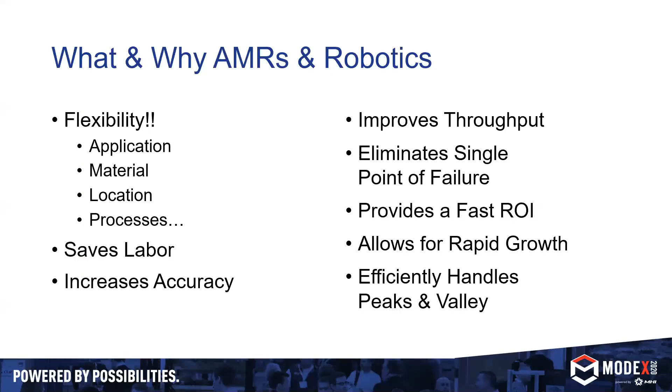You keep on working without losing any throughput, productivity, or meeting your daily requirements. There's always a fast ROI when done correctly, and it allows for rapid growth. Once again, back to that flexibility - you can add devices, add different systems, grow while you're actually using it, and it helps handle the peaks and valleys of everybody's business very, very well. It's all a matter of design.

It's so flexible that there's what we call an easy proof of concept, or POC program, that Conveyco just launched. It allows us to use that flexibility and scalability, not to mention it's easy to move and locate, with minimum infrastructure needed to design a system. We use our Right Fit 7-step methodology process to walk down the path, starting with identifying needs, desires, and objectives, moving on to data analysis, going into design and system emulation, being able to price out what a full system is versus what a smaller proof of concept segment will require.

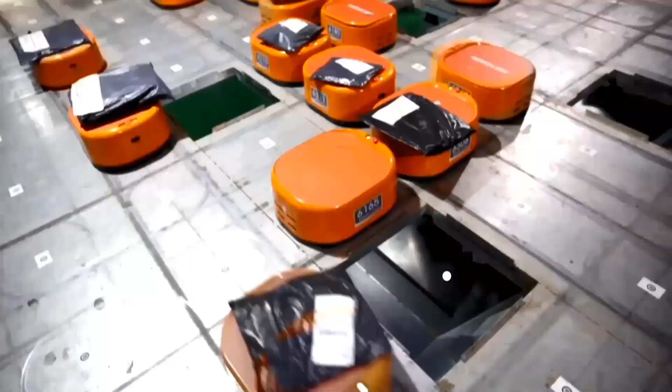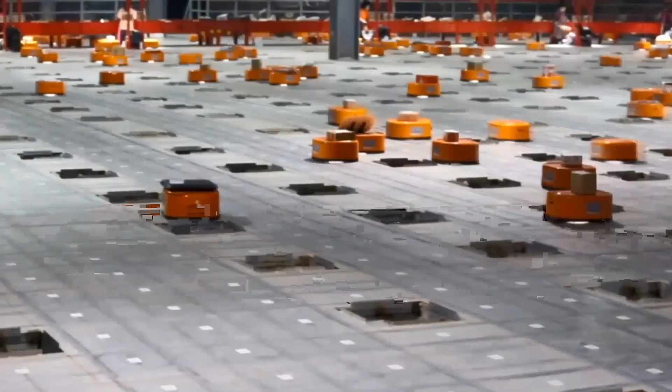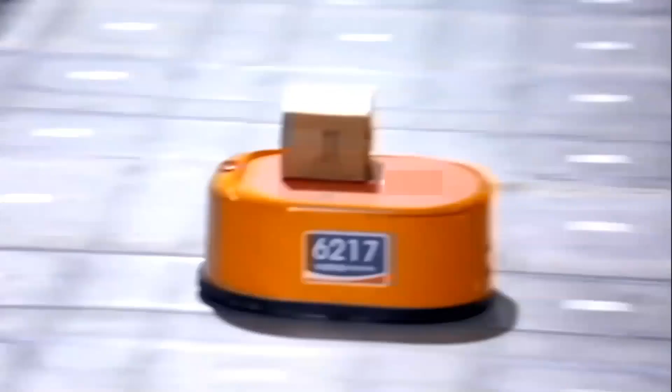High-speed sortation. This is an example of bots that are being inducted. You have your induction, taking the items, putting them on top of the bots. There's a reader up above, it reads the barcode, takes off, and goes to its chute. Each chute represents an order. They work in tandem, they're autonomous, but there's of course a central robot control system. This model tilts, goes down the chute to complete its order, and the order keeps being filled as the bots keep going until it's done, and I'll show you in a second.

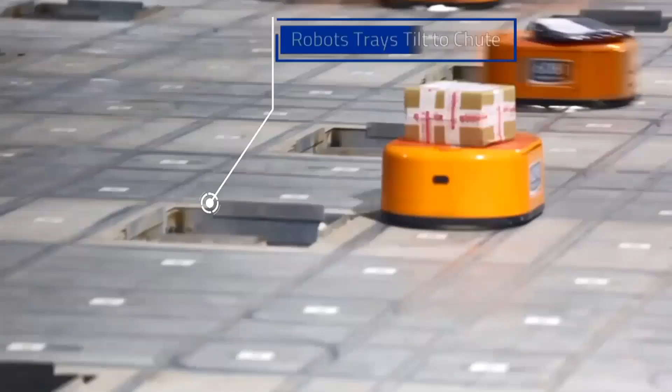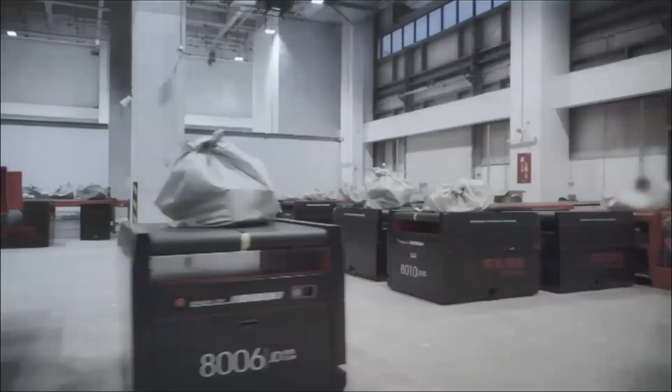Right now in this type of system, we're on a mezzanine, so we're on the top level and the chutes are down below. When the parcels come down the chute, they're being collected. When the bags are full, either a person or an AMR comes to collect them, delivers them to shipping, and right out on the truck.

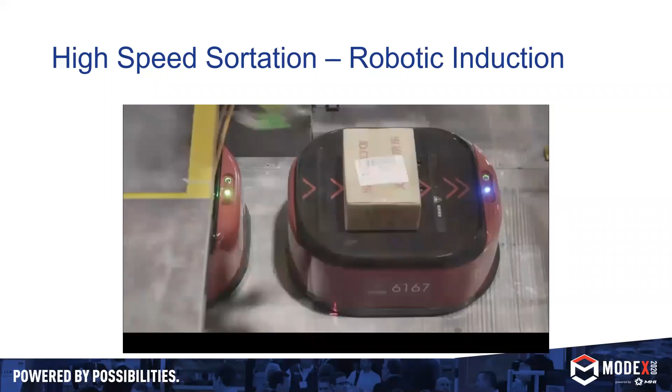So it can be as manual or as automated as necessary, and that all boils down to the return on investment. What does that look like, what does it require? Because we just saw human beings doing the induction, but in some cases it's robotics. It's being able to use robotic arms to place the items, the inventory, on the bots, at which point then, same exact application, they go to their chutes and drop it. This is all a matter of labor and return on investment. What makes the most sense for you?

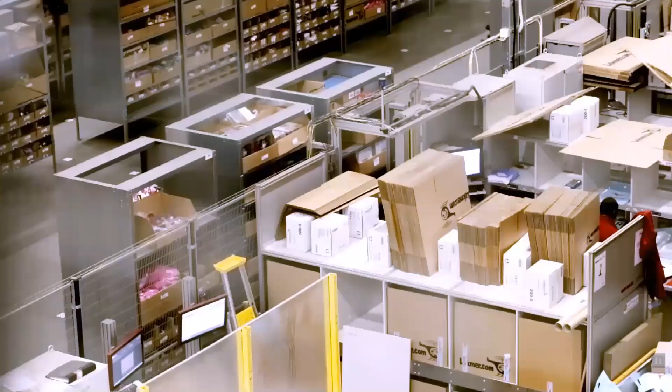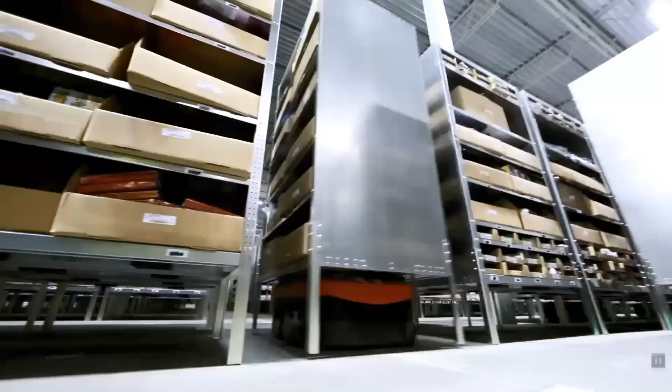Goods to person. This is a great application in which you have an area with low shelves, and you have bots that go underneath the system, underneath the specific shelf that it requires, lifts, picks it up, and brings it to the workstation. In this system we're looking at, there's 1,500 racks, 65 AGVs, 3,500 different SKUs. They're replenished, stored in the area.

In this system, you've got a 20% savings of space, 60% savings of labor.

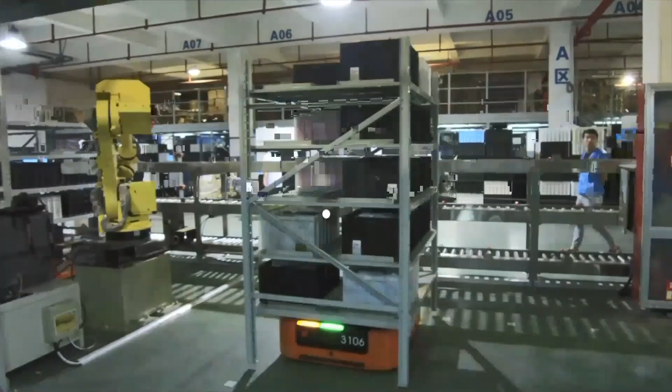Likewise, that same concept, but in this case, I'm using a robot. It's all about the justification. So I could be feeding from manufacturing, I could be feeding from inbound. The robot's picking the totes, putting them on the shelving. Shelving's picked up by its AMR, and now it's being delivered either to a pick window or a pick station, to storage, could be replenishment, could be shipping. But it's all about what the ROI dictates and what makes sense for your business requirements.

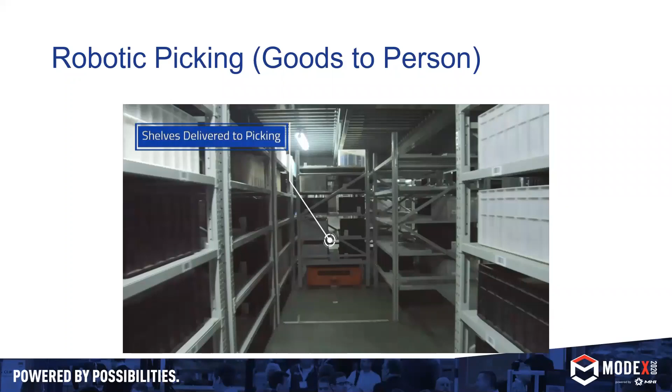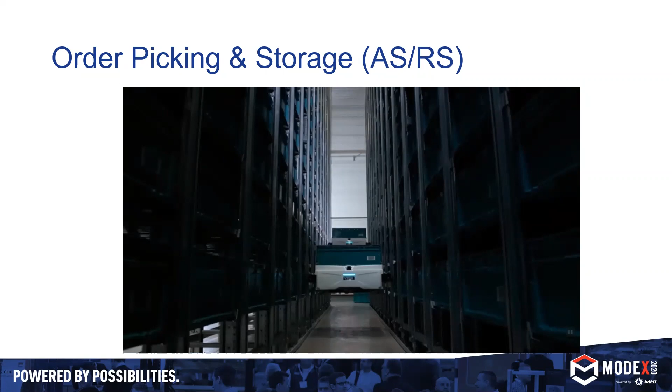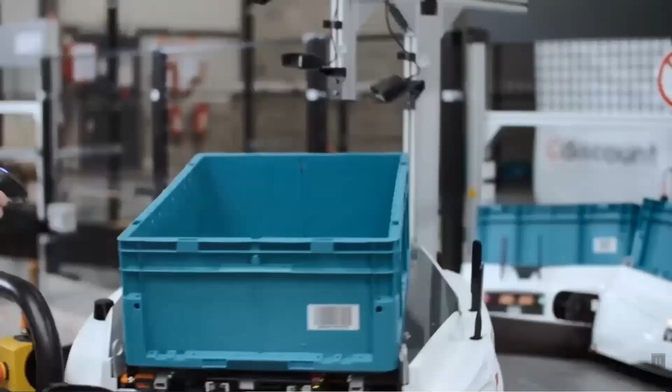This is a brand new technology in which it combines AMRs and high density storage to create an ASRS system. These bots travel on 3 axes. They go up to the shelving, climb up, go to the position they require, take the tote out, bring it down to the floor, and deliver it to a workstation. What makes this beautiful is that the workstations are easy to create. You can use more, you can use less, based upon your actual business.

In this illustration, you can see a little bit easier that the bots use their 3 axes, move on the floor, climb vertically, grab the tote, the inventory. You can add additional storage without missing a beat within the system. You can add bots without missing a beat, so that your velocity and your capacity are totally flexible.

We're back to that flexible message with AMRs.

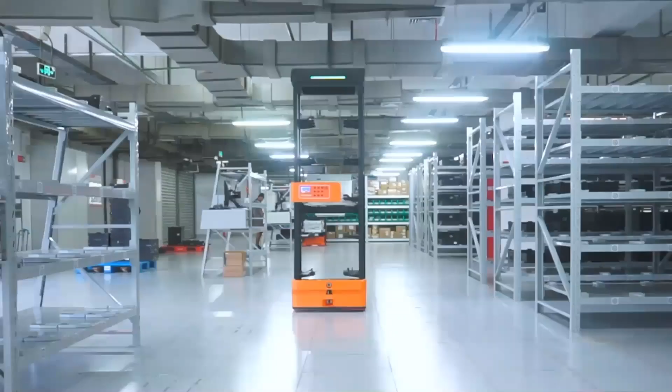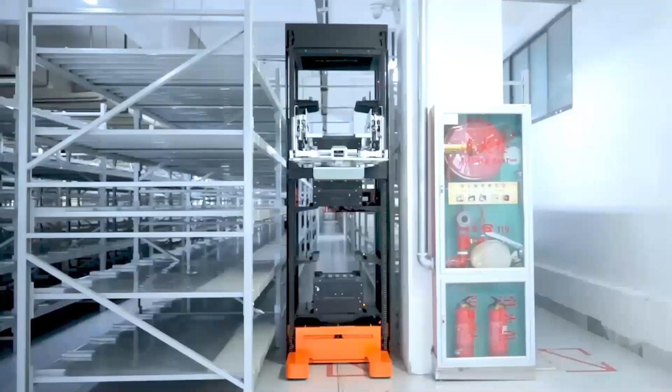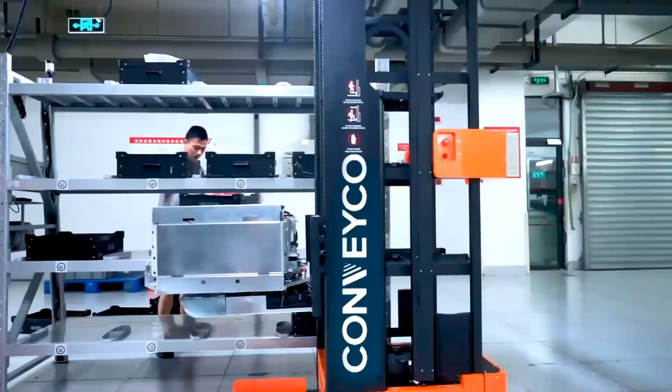Replenishment. Here's a system that has multiple shelf levels. It will go to shelving or conveyor, whatever the inbound is, pick up a tote or a box, and then deliver it to shelving, a flow rack, a work cell, another piece of automation. The opportunities are almost unlimited as to what it can do, but what it's doing is eliminating people walking, searching, bending and stretching.

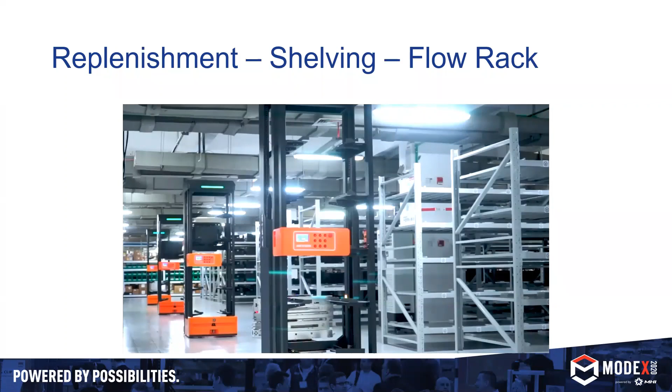Retail store. Whether this is mixed use or a retail store, this is another system a little bit like the other, where it has a shelf which it brings things on, stores, and then goes and places where it needs to. But this system is definitely designed more for human interaction, where it sees the person and moves around them. It's also designed to work with people. People don't necessarily stack things and put things in a neat way, so the bot actually has the ability to straighten, take it, and reposition.

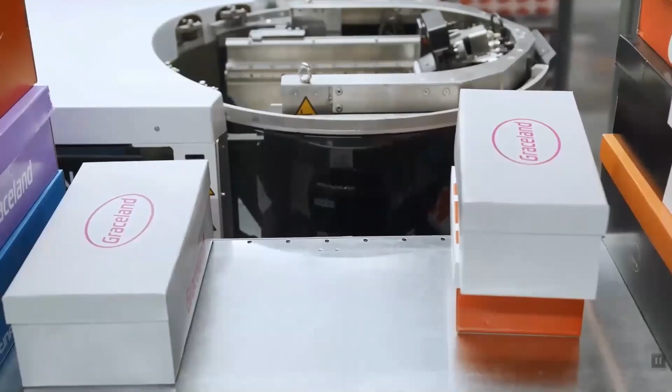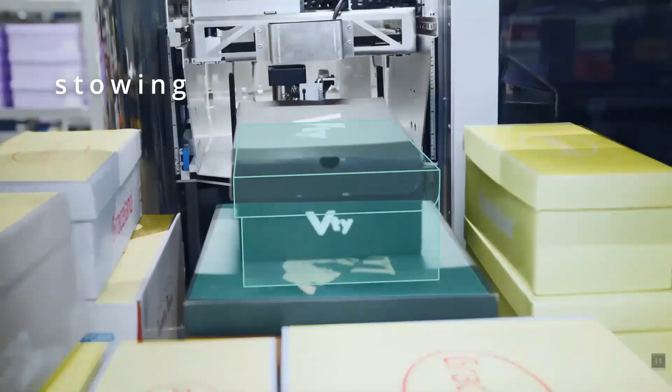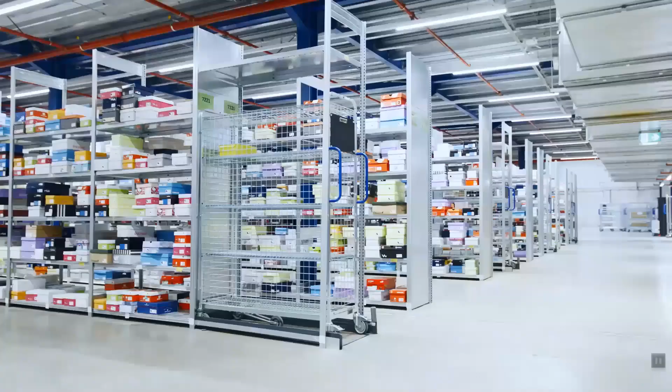It knows it needs to put the box back. It looks at what the other box is and sees exactly how it needs to be stacked. Likewise, it can transfer. So the system goes around, makes all of its picks, in this case shoes. It then makes multiple trips, puts it back on a stack of shelving, and indicates to the picker that it has already completed its task.

A zone-to-zone AMR. Robots place order totes in product aisles, pickers stay in the zones and pick the orders, and the robots transport the orders from zone to zone. This helps reduce walking and searching, keeping people focused and centered.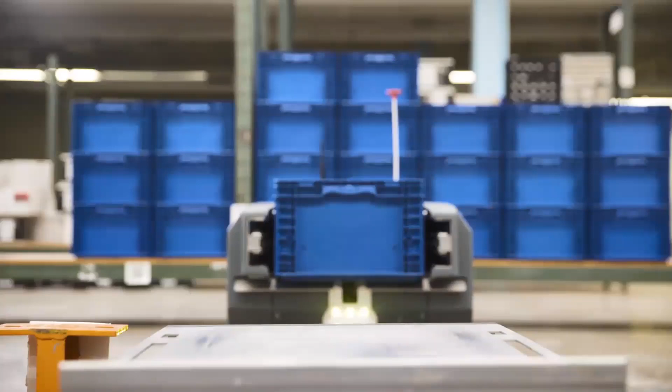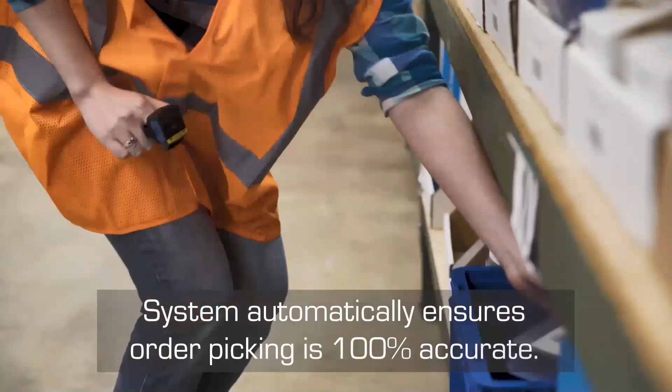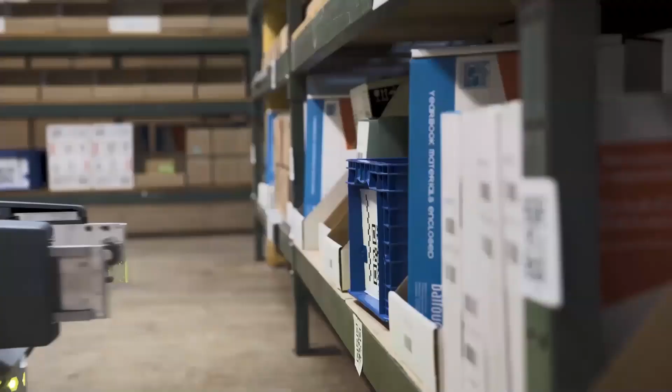So we have the worker, she's confirming her pick, confirms the item, places it in the order tote below. That's the blue tote you can see right over there. When she's done, she completes her scan. The AMR knows where it is and that it's complete and waiting for it, picks it up for transport, and delivers it to the next zone. The system allows human beings and bots to work in the same exact environment.

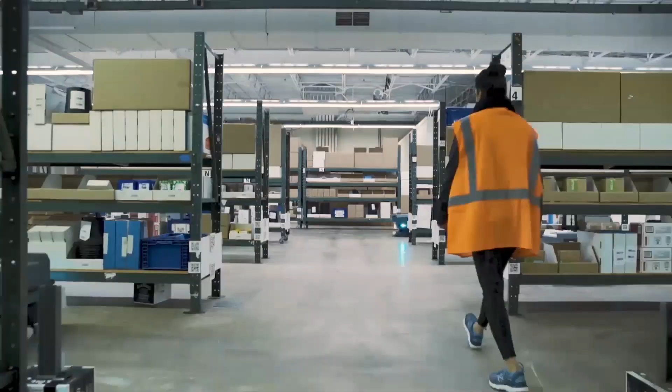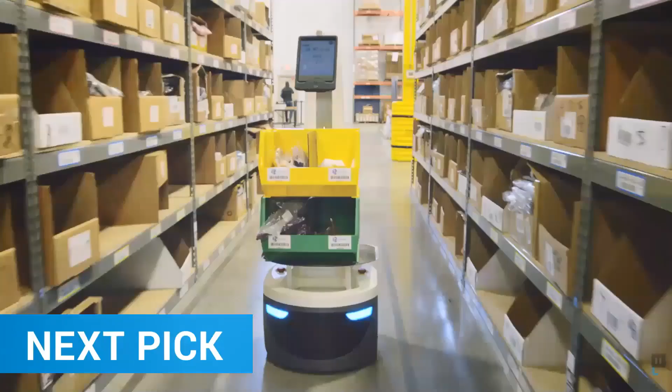Person to goods. So we've got our tote induction. We put it onto the bot, and the bot travels to the pick location. You now have either people working specific locations, or in some cases they follow the bots throughout the system, depending upon the workflow. The screen tells them what the SKU number is. They then verify it with the scanner, place it in the correct order, hit task complete. When the picks are completed, they go to pack and ship.

So there are many types of bots, as we mentioned, and many different workflows that can be used to optimize them and to optimize your processes.

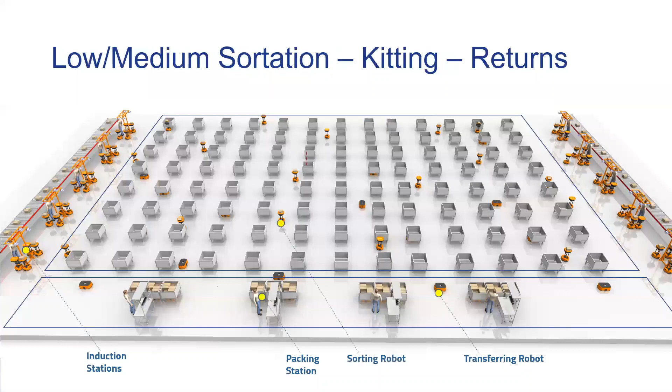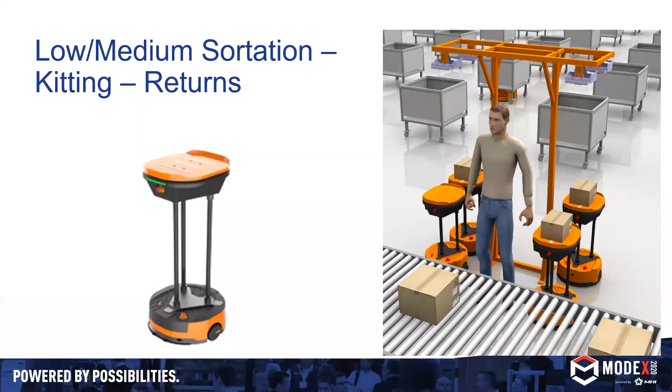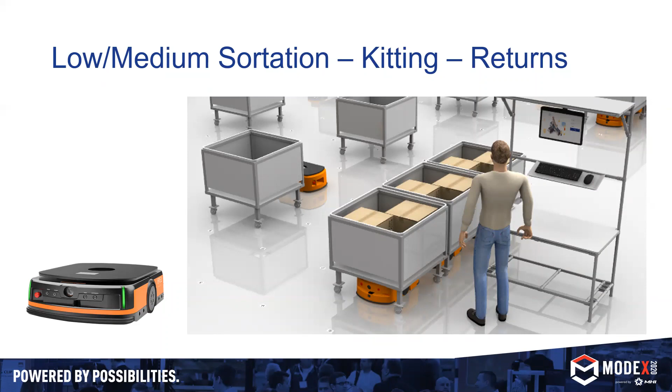A low and medium sortation, kitting, returns type system. We're looking at induction stations on the left and the right. We then have a high tilt sortation bot that's in the center. And then we use the pick and place bots to actually pick up the cases and take out full ones to shipping and bring in new ones to continue the order. To give you an idea, that's what the bot looks like, and the induction is simply the camera up above. You can see the Gaylords behind him, so those are used until full. Then when full, this bot will take it and bring it to packing, likewise bring empty Gaylords and put them back into position. The configuration and density can all be changed based upon your actual application.

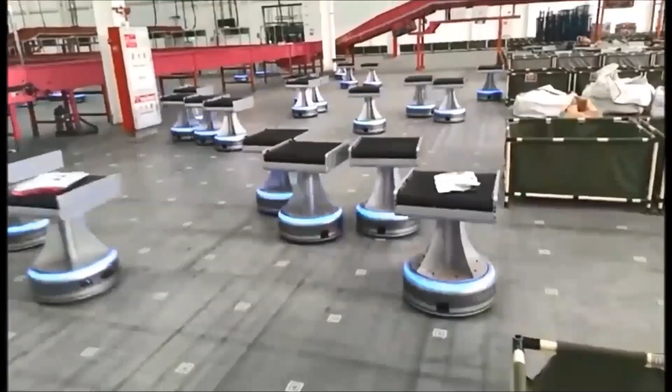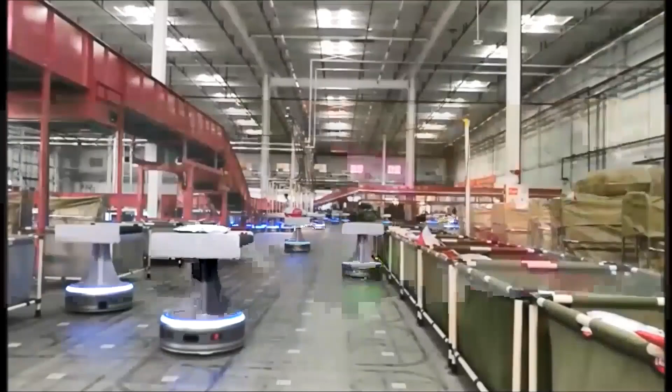To give you an idea, what you're looking at right now, those ladies are doing inducting. They're simply taking items, placing them barcode up, and the scanner reads it. You can see your Gaylords in green on the right. The bots simply go up to the Gaylord. These have more of a cross belt top to them. The items are then discharged into the Gaylord and then go back to induction. This process is just round robin and continues until completed.

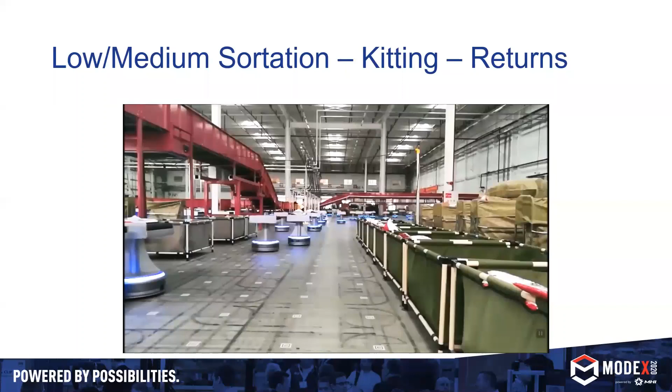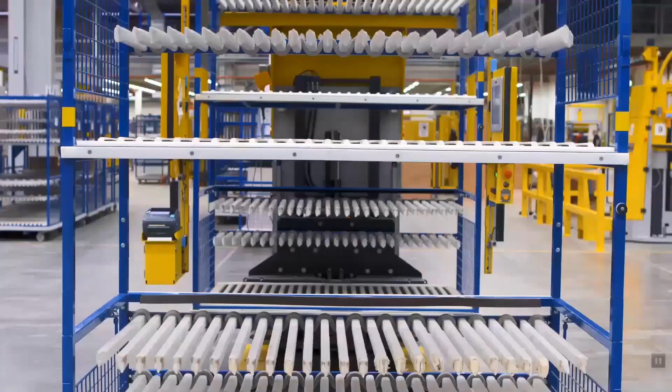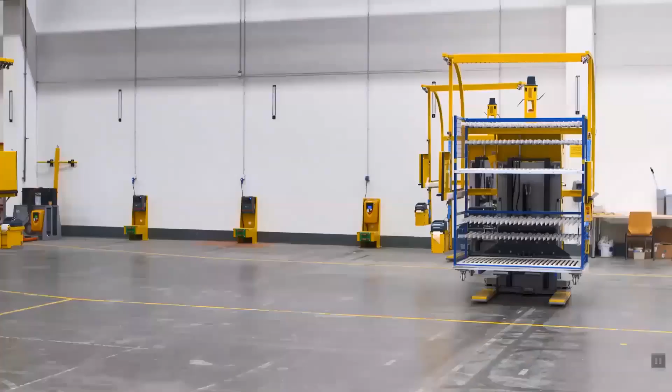Kitting. Now this is a more sophisticated kitting system. In days of old, maybe 2-3 years ago, you would have a person pushing a cart and building a kit. In this case, you would use this AMR, which picks up the cart and travels with you, but it also provides a number of technologies with the cart that allow the operator to work, and nothing beats a boy and his robot. Here we go to start the picking.

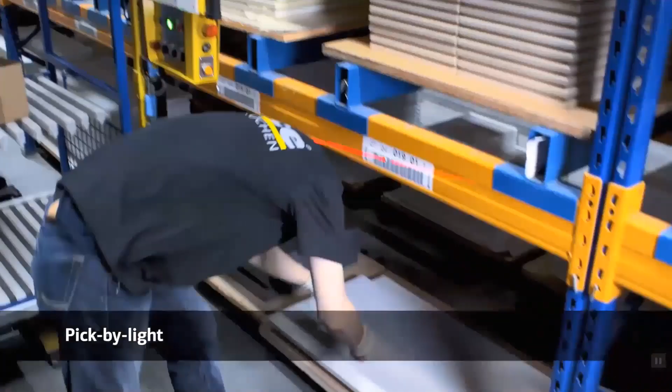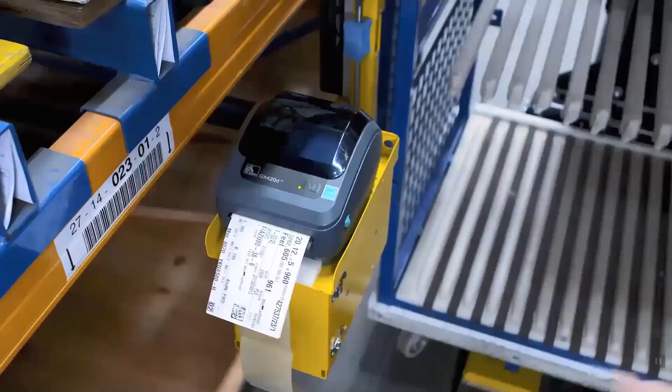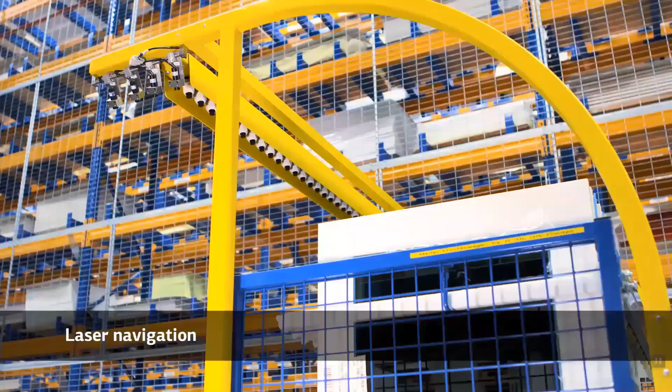The AMR is going to direct him to exactly where he needs to stop. It has a full pick to light system. You can see the red light on the barcode's license plate, telling him which piece to pick and the quantity to pick. Likewise, the cart has a pick to light indicator, which we'll see in a second, but here's the label. You can see the red dot by his thumb, telling him exactly where to put the label. He hits task complete, and the laser navigation on the bot will then, when complete, go to the central storage.

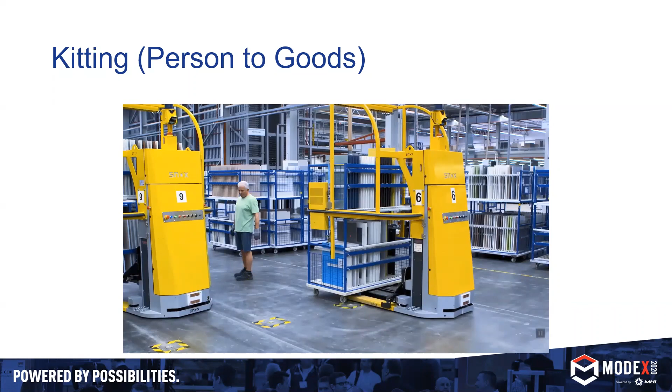It's the end of the process. It either goes to manufacturing or shipping, wherever its next destination is, and the process repeats, keeping people in their zones and making sure that what they pick is 100% accurate and marked. Delivery to work zones.

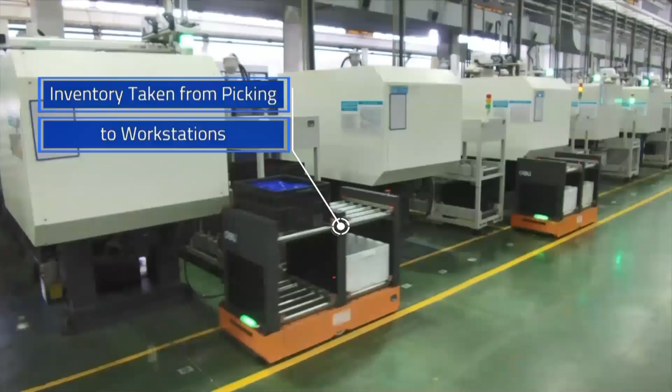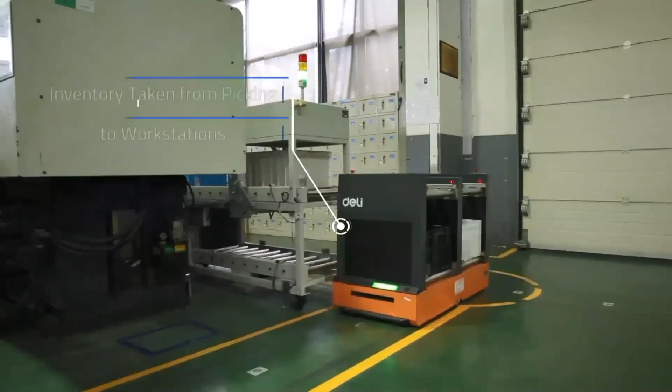This is a manufacturing cell, but it could just as easily be distribution. You see an AMR with top and bottom positions that comes up to the workstation. Inventory is unloaded, and likewise inventory that's ready to be moved is loaded, and it repeats, taking it throughout the facility. This eliminates people with carts and eliminates humans from having to go from place to place and possibly putting it in the wrong location.

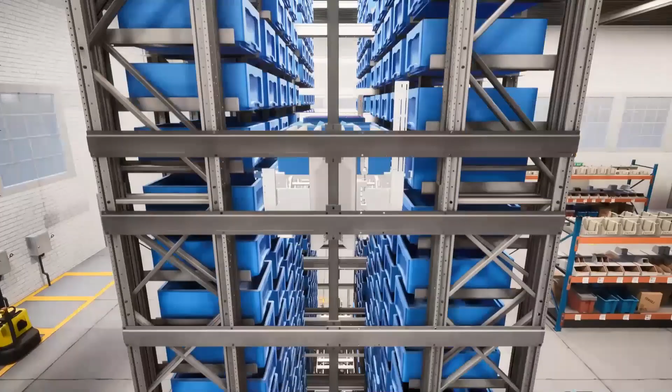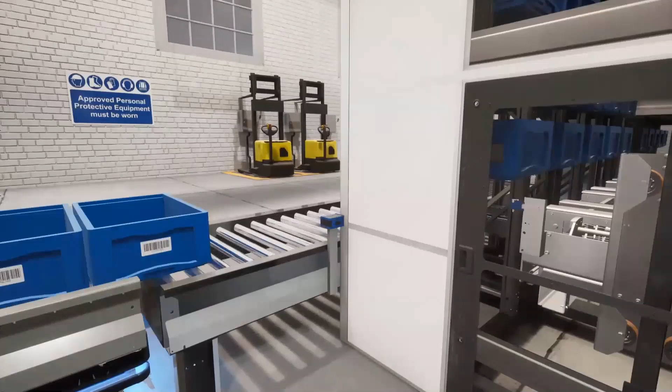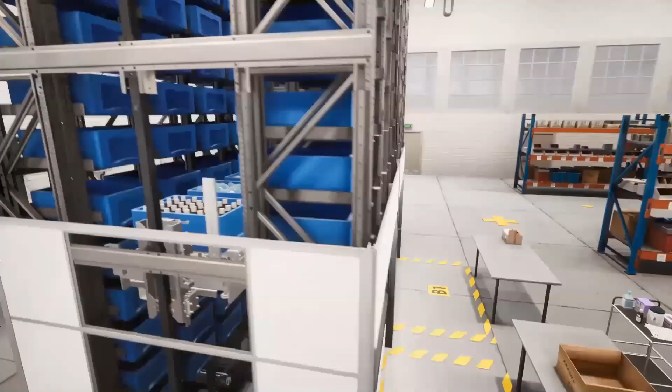Feeding a buffer storage. Now this looks like a VLM, but it is actually not a VLM. Instead of trays, those are individual totes, individual cells that are all used autonomously. You have an AMR now that's bringing up either inventory or orders, brings it to the conveyor for induction. It's read. The system will then take them, store them, buffer them, likewise bring it out when it has to be brought out to either shipping or manufacturing, wherever it needs to go. The system is constantly repeated. It can also be delivered to the front pick window rather than the AMR, if preferred, to do your picking there. So it all depends upon the actual process, the speed, the throughput, and the application.

Receiving. What you don't see is a person. We have the forklifts, AMRs, they're able to go in. In this case, it's RFID. It could just as easily be barcode scanning, a number of other technologies, so that we've now inducted. We have acknowledgement that we're here in the facility. We place it to be stored, whether it's into a high bay, ASRS, and that's just depending upon your flow.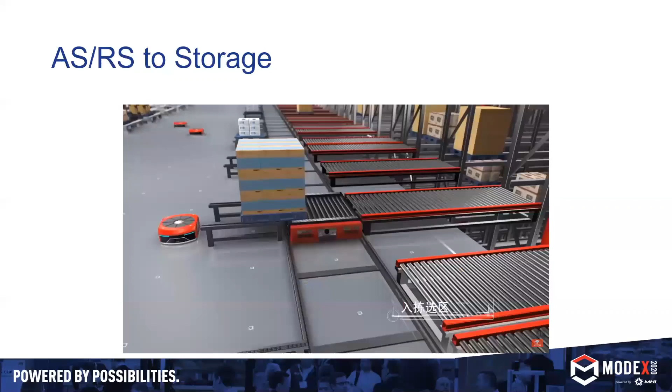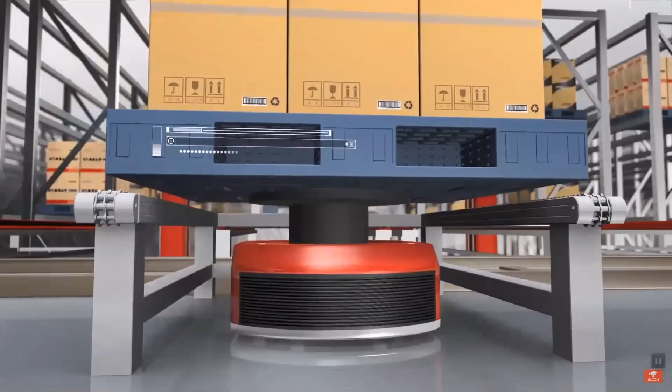Using ASRS, Automated Storage and Retrieval System, with AMRs, the pallet comes out, the bot reads and verifies it's in the right position, lifts its load, understands where all the other bots are and the location it needs to go to, and then begins its journey.

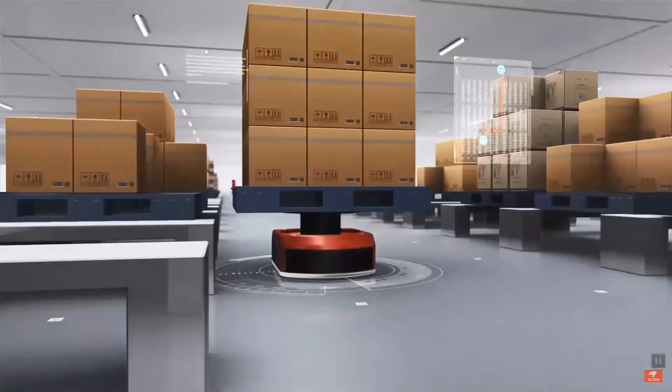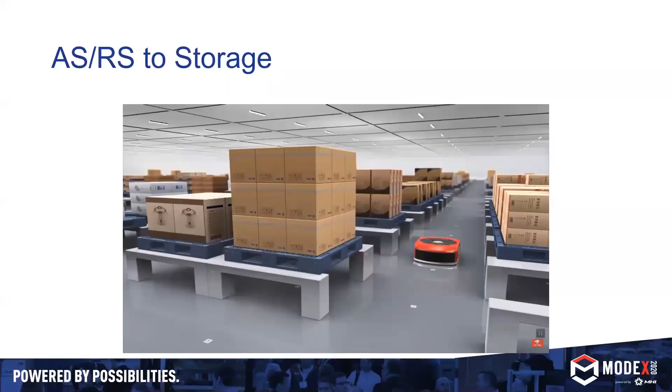It's constantly scanning, knowing, looking. It sees another bot that is either waiting or in a position that it didn't expect. It reroutes itself and goes again. Delivers it to its location, and then waits for its next direction, what else to pick up and deliver.

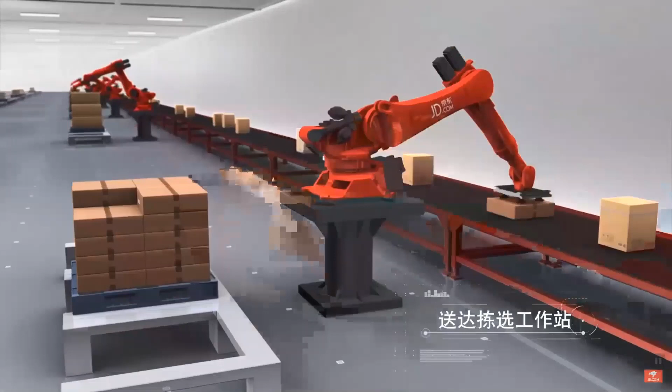Depalletizing, full case handling. So here we have our bot again. He goes to his load, picks it up. He's routing his shortest path to where he needs to go. Brings it to a robotic arm, depal. The AMR then continues on to find the next load that he has to bring over. The arm then unloads. We now have a label being printed on it.

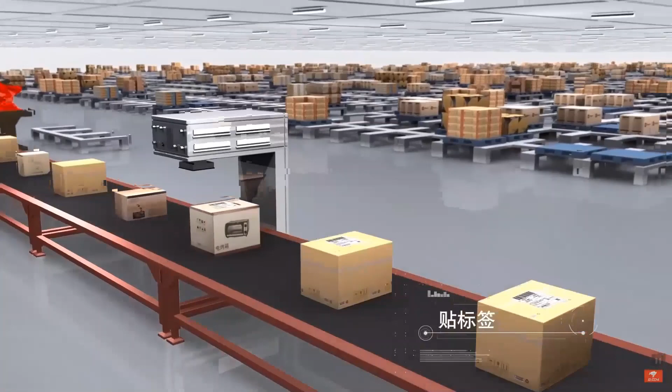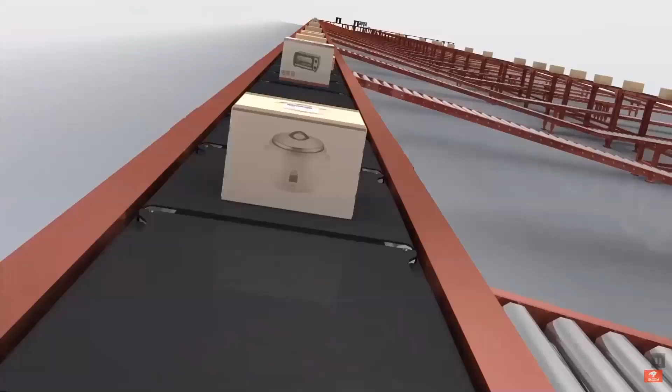So we've taken inventory that was bulk, put it onto the conveyor. It's now a label is printed. It's now an order. It's now going someplace. It now is a piece of inventory that's being shipped to a specific company or person who's ordered it. Gets routed down to sortation because now it's going to have to be delivered.

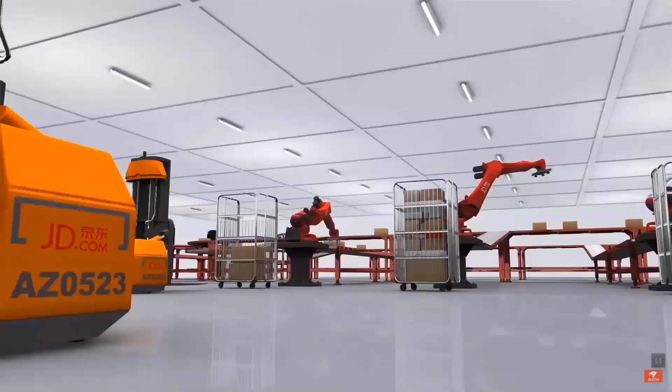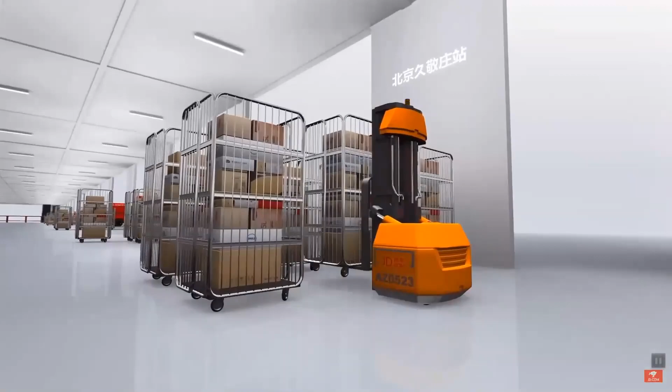In this case, we have another robotic arm that puts it in a U-boat cart. This could be a pallet, but in this case, what we're actually looking at is a system for inner city 1-2 hour delivery. Takes the U-boat, the cart, and is right now buffering it. When all the items are there, it's going to bring it into the van or the truck, so that way the van can leave and fill its orders.

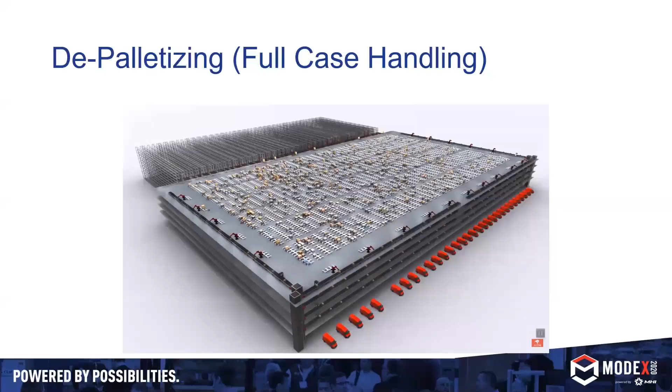Now, this is how you get 1 hour, 2 hour, needless to say, same day delivery, especially in urban areas. Because when you take a look, this is a low ceiling, inner city type structure, which has always been a problem, and different from how we build most of our distribution centers. But this is how AMRs can help solve that problem.

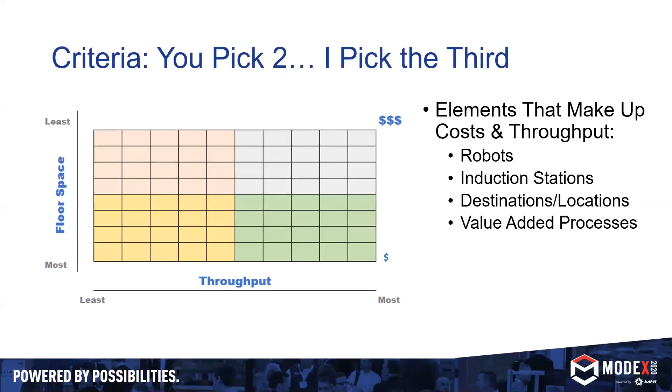I always like to hit these conversations because people are always like, what's it cost? What's it cost? And that is on a case by case basis, of course. But to at least keep your mind thinking about the basics, you have certain criteria. You've got your floor space, you've got your throughput, and of course your dollar. The more throughput, the least amount of floor space, that's your upper right quadrant, the more expensive. The least throughput, the most floor space, your lower left. The idea is finding the blend of what makes sense for your business case and what creates the return on investment for you. And that's what AMRs are so flexible in being able to do.

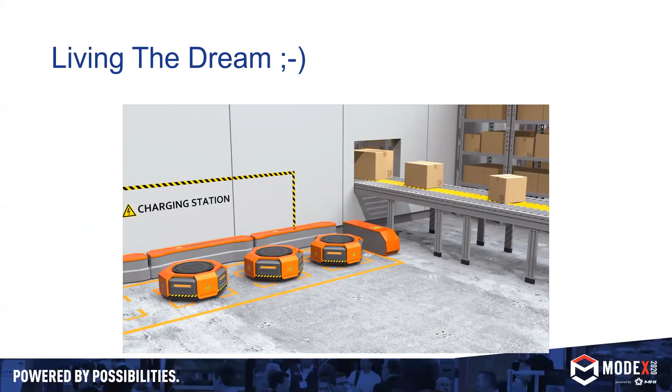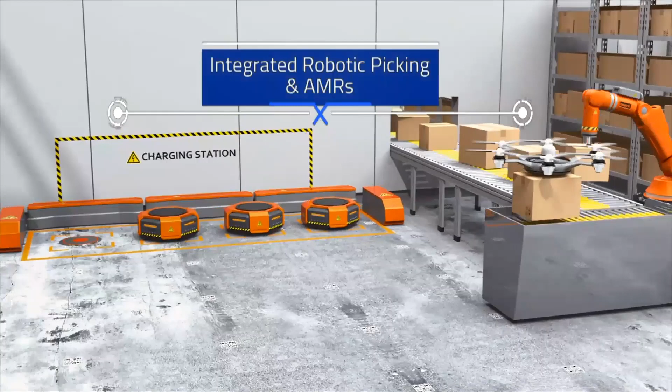I call this living the dream. I've had this piece of simulated art for about 5 years. 5 years ago, it was like, wow, yeah, maybe someday. I mean, we've got everything going on here, AMRs. But what it really shows is that in just the 5 years that I've had this piece of art, it's gone from, wow, wouldn't that be nice, to this is pretty much reality.

Now, I don't know how many drones are actually moving inventory within buildings, but we do have drones that are doing inventory management and taking inventory off of high bay. So that is already here. That is a today application. So my only point is that things are moving very quickly, very fast, and the name of the game is to see what makes sense for your business requirements, and to see whether or not the flexibility makes sense.